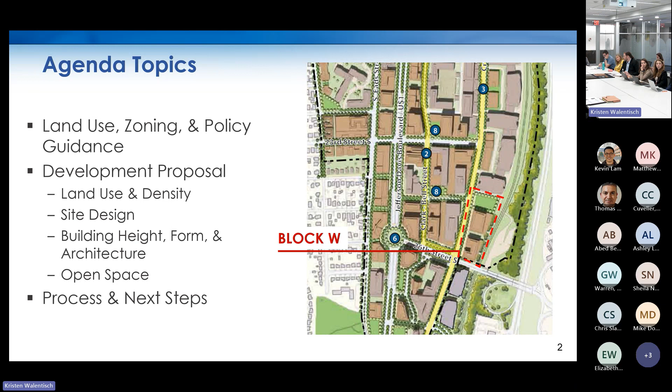So again, this is a refresher for those of you who've been along for the public review of this project. This is Block W. It's currently undeveloped and home to the sand volleyball courts in Crystal City, as well as a workout park, both of which are owned and maintained by JBG. There is also a playground and an outdoor seating area. There's a service road accessible from the 26th Street South and Crystal Drive intersection that runs north through the site, connecting to a gravel parking lot used for construction worker parking, and an underground tunnel that connects to a parcel east of the railroad tracks also used by JBG for construction worker parking. That service road also provides parking and loading access to several buildings north of Block W.

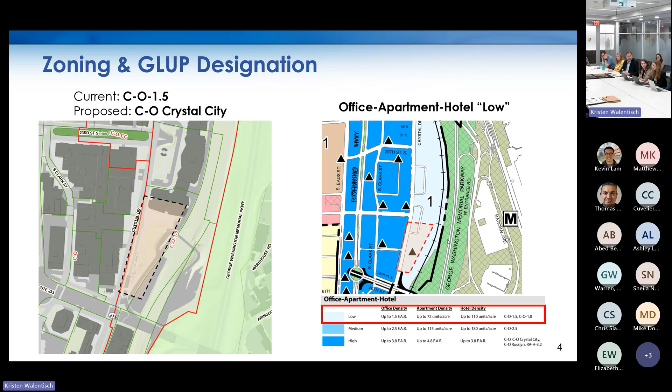Running parallel to Crystal Drive, there's also an exit ramp for the elevated airport access road, which provides connection to Crystal Drive from the airport. This exit ramp must be removed in order for the site to be developed as planned, and the removal of the exit ramp is also called for in the sector plan. The site is zoned C-O-1.5, and its designation on the county's general land use plan is office, apartment, hotel, low. Block W is also located within the boundaries of GLUP Note 1, which is the Crystal City Coordinated Redevelopment District, which permits heights and densities as called for in the Crystal City Sector Plan, where sector plan goals are being met. The applicant proposes a rezoning to CO Crystal City.

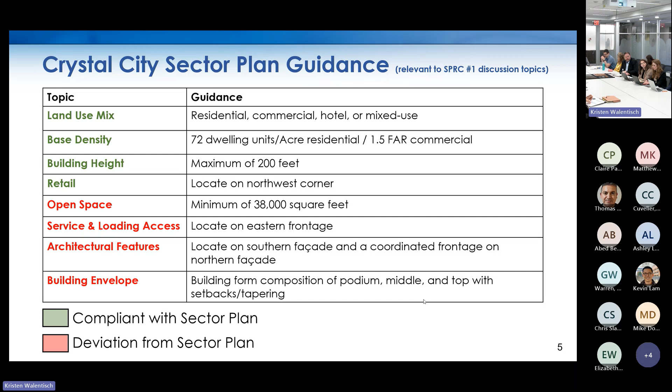Apologies. Staff has found the proposed development deviates from the sector plan in regard to size of provided open space, location of service and loading access, provision of certain architectural features, and guidance regarding the building envelope. We'll look at each of these in more detail in future slides.

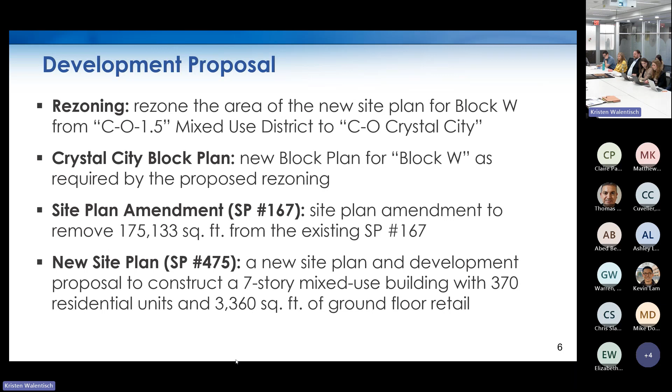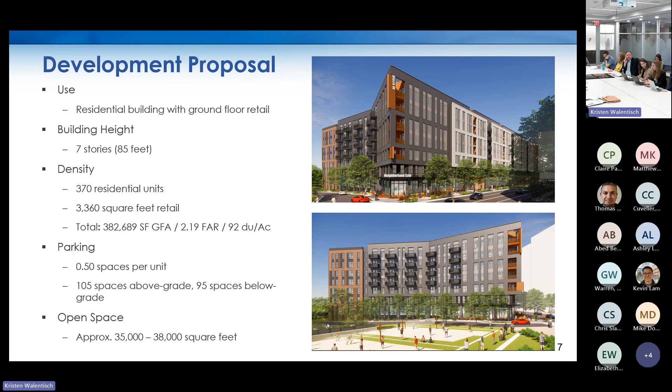Taking a closer look at the new site plan, the applicant proposes a mixed-use building approximately 85 feet in height, containing 370 residential units and about 3,360 square feet of ground floor retail. They also proposed a parking ratio of approximately 0.50 spaces per unit and open space in the size of 35,000 to 38,000 square feet. We'll look at that in more detail as well.

In an effort not to repeat what you've heard during online engagement, I've provided a quick assessment on the first discussion topic, land use and density. The proposed land use conforms with the sector plan's guidance for the site, and the rezoning is supported by the site's inclusion within the Crystal City Coordinated Redevelopment District. Regarding density, staff notes the base density is 72 units per acre, and the applicant proposes 92 units per acre. The density proposed above that base is supported by the site's inclusion within the Crystal City Coordinated Redevelopment District and shall be provided in exchange for community benefits.

The site design should be familiar to you by now. The site's been designed so the building is situated on the southern portion of the site and the open space is on the northern portion. The applicant has introduced a vehicular service road from Crystal Drive between the proposed building and the open space, intended to provide access to the underground tunnel and connection to properties to the north. Parking and loading is accessed from an additional service lane on the southern frontage of the site.

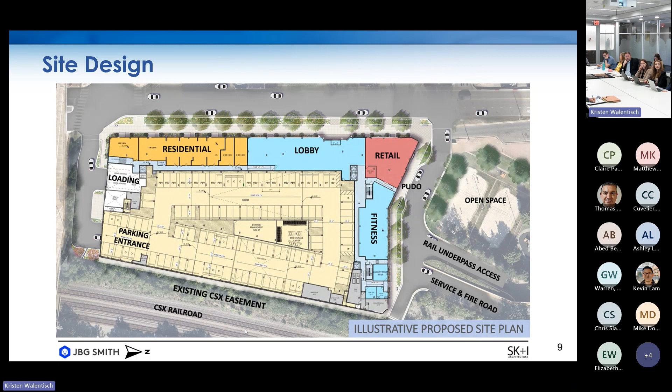We'll take a closer look at outstanding concerns on site design. First, staff is still reviewing the transportation-related impacts of the introduction of the service road mid-block. We'll plan to have updates for you at the second SPRC meeting. Secondly, as currently situated, the service road reduces the amount of open space that could be provided, which may affect whether the applicant can achieve the sector plan minimum required open space.

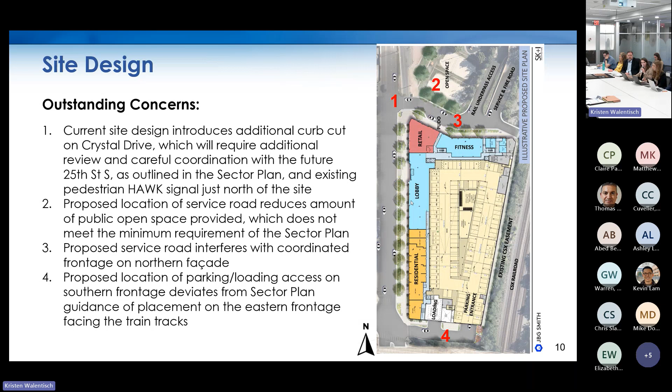Third, the service road interferes with the provision of a coordinated frontage fronting the open space on the northern facade of the building. Fourth, the location of the parking and loading access deviates from the sector plan's guidance that these elements be placed on the eastern frontage of the building adjacent to the railroad tracks. These are all elements proposed in the current site design that we'd like you to keep in mind for discussion this evening.

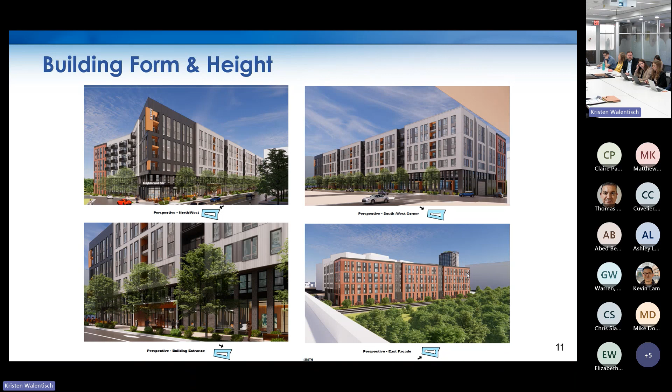Again, as a refresher on building form and height, the proposed building is 7 stories with a 2-story podium, and the upper 5 stories overhang that podium base. Renderings are on this slide.

Looking closer, because the building is much shorter than was envisioned for the site, the proposed building form is technically inconsistent with the sector plan's guidance on podium and tower composition. Additionally, staff has noted the proposed design lacks tower setbacks and also lacks a distinctive building top, both features called for in the sector plan as shown in the image on the left.

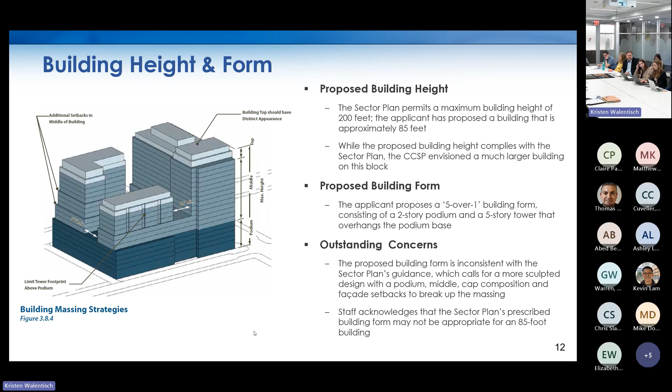Tonight, we'd like to hear from you as to whether that sector plan guidance is appropriate for a building of this size, among other aspects of that guidance.

With respect to architecture, the applicant has made some revisions to the southwest corner where an architectural feature is prescribed in the sector plan. The applicant will describe specific design changes in more detail in their presentation. We'd like your input as to whether the revised design achieves the intent of the sector plan's guidance for this frontage. You can see here the difference between the original architecture and the proposed. I'm sure the applicant will have the same side by side.

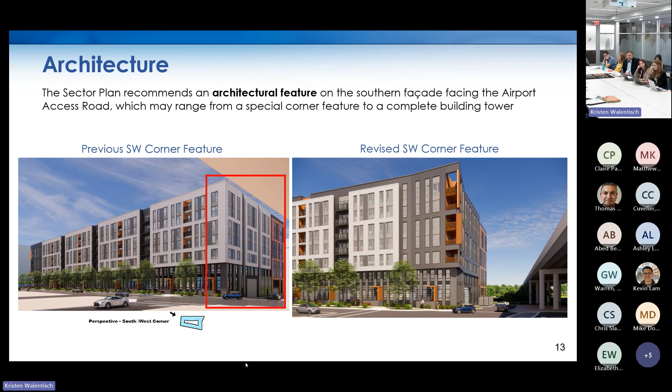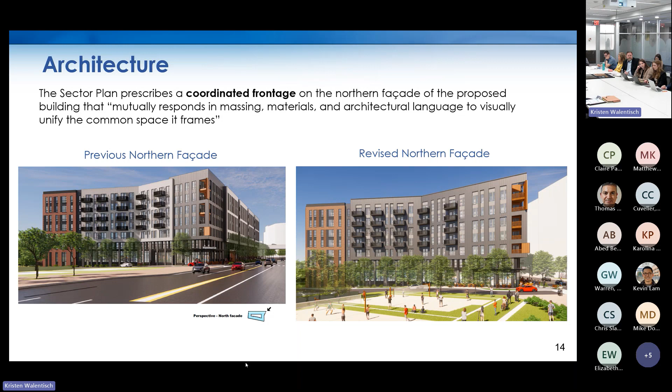The applicant's also made revisions to the northern facade where the sector plan calls for a coordinated frontage framing the park. Staff finds the revised design an improvement over the original design and would also encourage your thoughts on this detail as well.

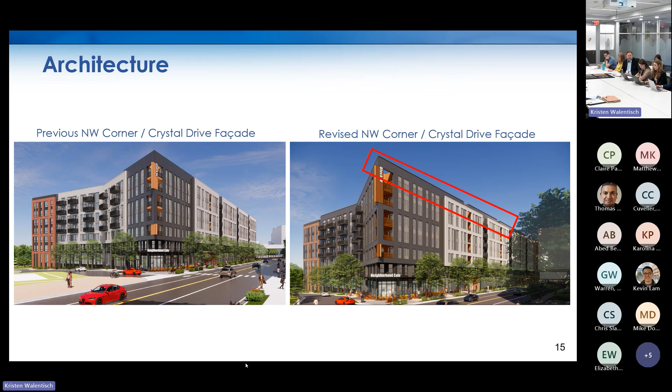Here also is a revised design for the northwest building corner, which the applicant will describe in more detail. Do keep in mind that there is architectural guidance in the sector plan, but there's not architectural guidance in the sector plan for either this corner or the Crystal Drive frontage. It's on the upper stories of the building.

And then we are going to leave the open space discussion there for now and discuss landscape and streetscape features at the next meeting.

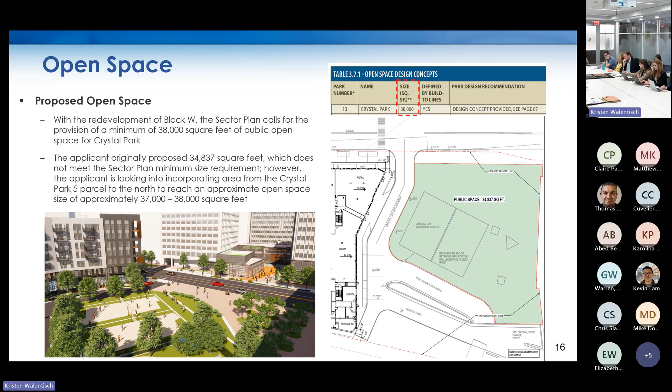Looking at the public review process, we're now at SPRC meeting number 1. Again, as previously stated, we had the LRPC meeting in December and SPRC online engagement in February. We're here talking the first half of the SPRC topics tonight, and then likely next month we'll have the second of two and the final SPRC meeting on open space part 2, landscaping, transportation, sustainability, community benefits, any other topics that may arise or as a follow-up to this meeting. After that, we will be looking for the project to advance to advisory groups and commission meetings and then on to the county board.

Just to quickly summarize the online engagement opportunity that was held last month, we did receive a lot of comments, so thanks for everyone who participated. A lot of comments are split in regard to their thoughts on the project, but most of the comments received were in line with the agenda topics we outlined in the presentation, which were in regard to building height and density, site design, and specifically the service road and the airport access ramp, the size of the public open space, comments on building form and architecture, and then also transportation in regard especially to those bike lanes, pickup and drop off locations, and parking and loading access.

A summary of the common topics is posted on the project's webpage, as well as a link to a comprehensive list of all the comments received. On the project webpage, you can access all 308 comments within a form, as well as a summary of common topics that were picked up by staff. The applicant and staff have responded to those common topics. And that concludes staff presentation.

Okay, well, thanks everyone for having us. As I mentioned, my name is Dolores. I'm the vice president within the JBG development group who's leading this project. I'm here with several of my colleagues, and both myself and Andy will do part of the presentation for today. But before we jump into the specifics, I wanted to lay the groundwork for what we're going to be discussing, as Kristen mentioned, the site context. So bear with me, it's a lot of the same information that we talked about in LRPC. We'll go quickly through this: land use and density, then the existing site constraints, the site design, and then I'll hand it over to Andy, who's going to be talking about the building form, the architecture, and the building height.

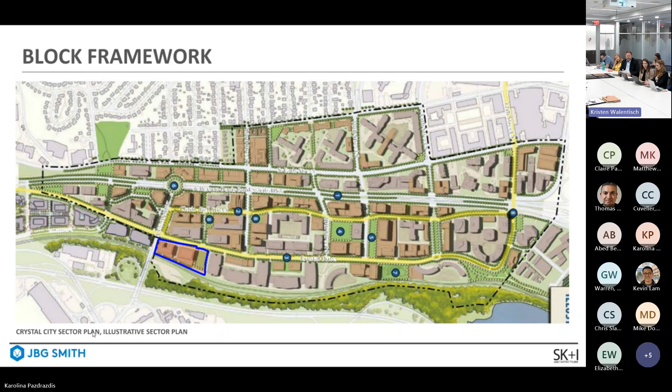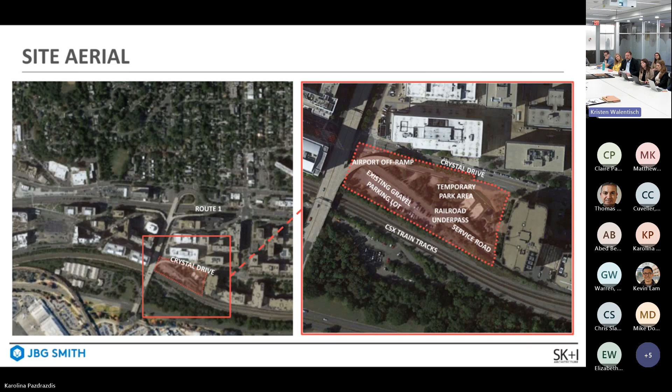We have some site context here. The top two images are from the ramp, indicating the current architecture there, and the bottom images show the temporary park on the left-hand side and the service road condition on the right-hand side.

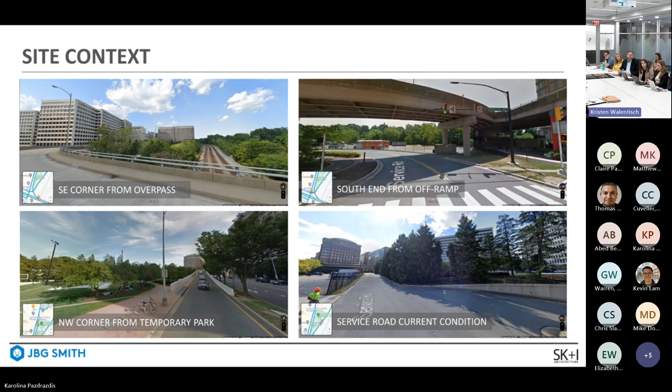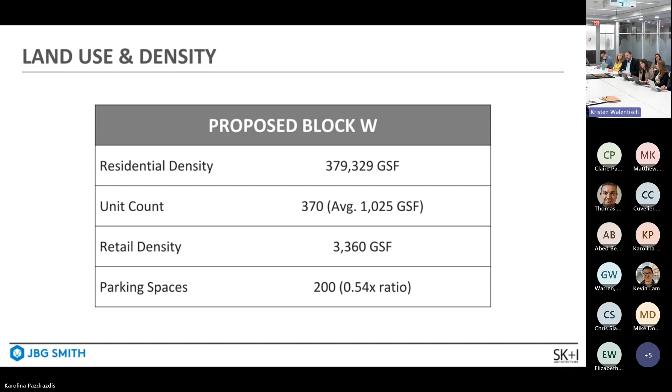From a land use and density perspective, our proposed plan is a five-over-two residential building, just shy of 400,000 square feet, 370 units, and a little bit less than 4,000 square feet gross on the retail density, and then 200 spots within the structure at a 0.5 ratio.

Here, what we wanted to talk about is our proposed plan in the context of our JBG portfolio. It's important to provide visibility to what we've been doing for the past several years. The last four entitlements that the firm has gone through, all within Crystal City, as many of you have participated in, have been high-rise buildings.

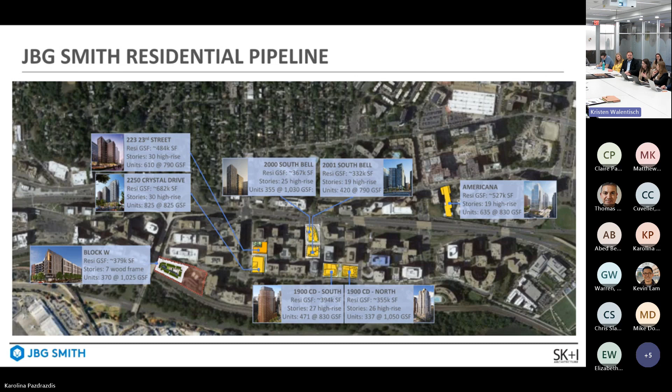We are going to be delivering, or will be in the process of delivering shortly, the two residential buildings for 1900, seven new high-rise buildings for the neighborhood. So when we look at the opportunities for housing across Crystal City, we're excited to be providing a different typology here — one that, if you look at the portfolio as a whole, has larger units and is catered towards two and three bedrooms, accommodating cheaper rents and larger units for families. That's the goal here.

From the existing constraints, before we jump into the specific site, one thing we wanted to provide highlights and an update on was the ramp. While, as Christy mentioned, this is not something that will be determined through the 4.1 process, we did want to make sure we were talking about this, because we do have to bring the ramp down in order to build the new building.

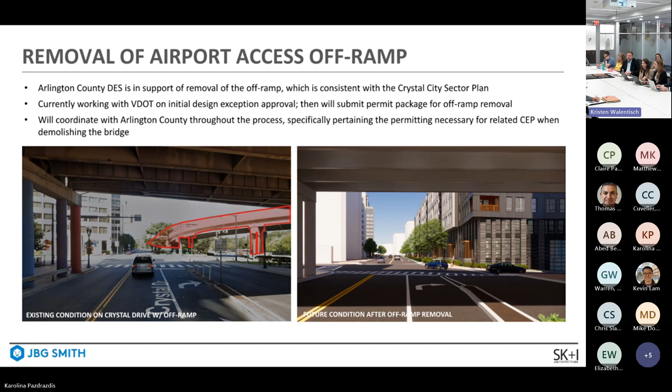From a removal perspective, the sector plan does support the removal of this. We've been working with Sergio and VDOT on the particular process, which will determine the different adjustments we'll be making to the sidewalk to ensure we still have a pedestrian path. One of the things we're doing is actually narrowing the lanes.

You can see here the whole area in blue is the area we will be providing improvements to. The ramp on the right-hand side is what will be coming down, but we will be making improvements all the way to Pier 12 to give you some of that transparency. One of the things we're going to be doing is expanding the sidewalk, making it ADA accessible by reducing the lanes within the ramp, or the overpass there.

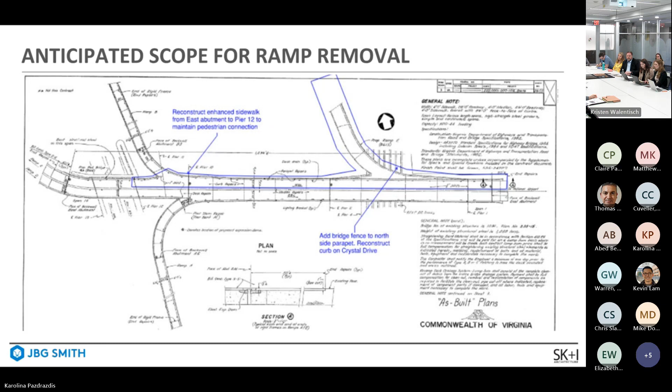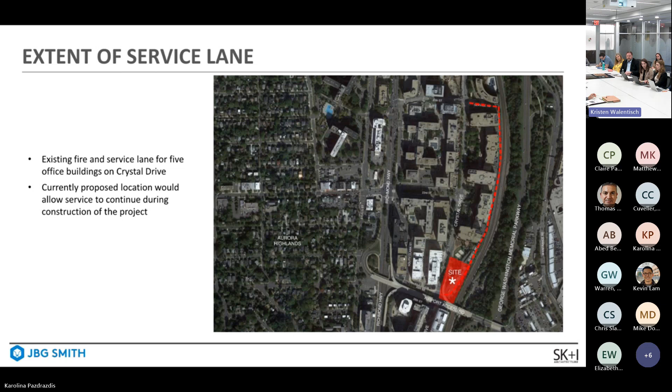One of the constraints we have here is the service lane. We have five buildings to the north of our site that have to be served by the fire and service lane that enters into our site. So we've designed a proposed plan that actually allows for that lane to stay open so that the fire marshal can go and service those buildings to the north of us. Next slide.

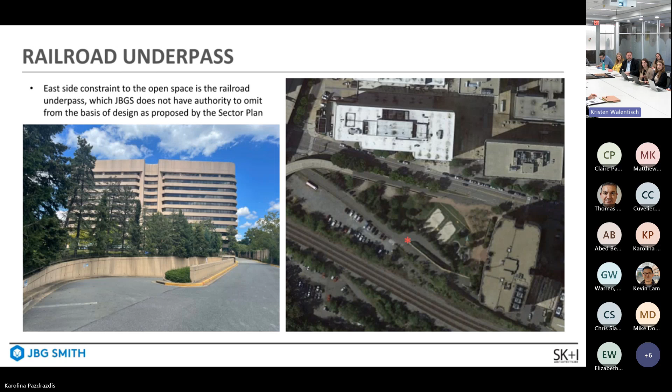Another constraint that shaped the way we were thinking about our design is the railroad underpass. On the east side, this constraint is unique in that it's not mentioned in the sector plan, but it's something we can't avoid, particularly because there are multiple parties responsible and have rights protected for access in and out of that tunnel. That's not something JBG can just have go away, so we have to work within those constraints.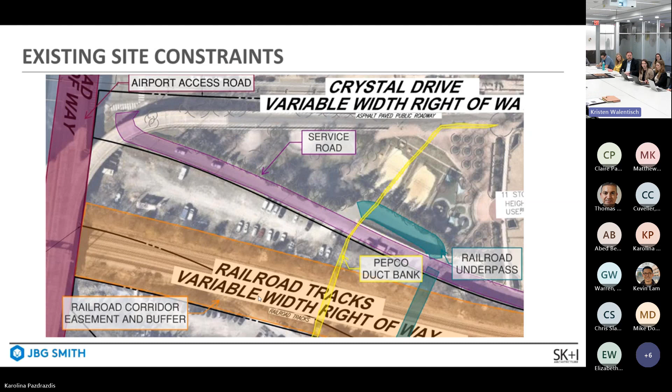From a site design perspective, we've studied a lot of different components and layouts of the site, and we're excited to be proposing this. What you see here is essentially all of our constraints within the site, but also with the ability to prioritize the open space on the right-hand side and really ensure we're meeting that 38,000 square feet we talked about. The 4.1 didn't necessarily hit it, but we've worked with staff to get closer to that number. As we heard in LRPC, this was a big one to make sure we were meeting.

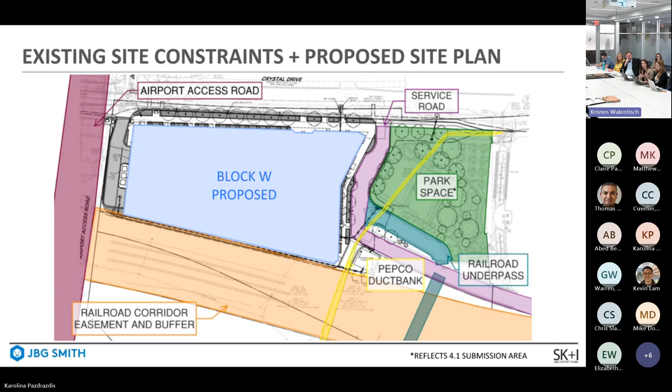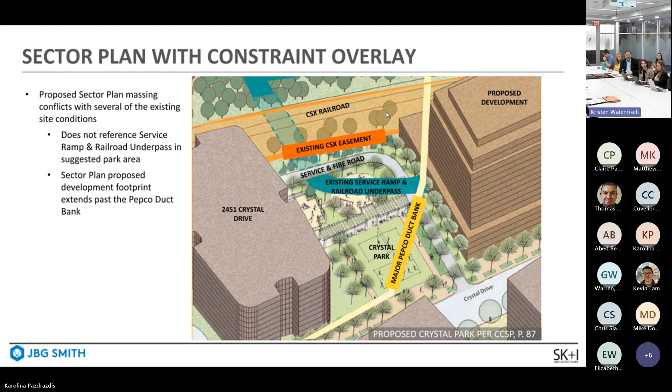Here we have the sector plan with the constraint overlay. One thing we wanted to point out is the illustrative nature of the sector plan and how it pairs with the existing conditions of the site. As mentioned, there's no reference to the underpass and the railroad pass through the middle of the site, so that's something we have to call out. We also don't have a major duct bank called out in the sector plan that goes straight into the proposed development site, as well as the existing easement buffer that also eats into the development site.

So what we've done, with Andy's team and Sheila's team, Bowler, is really work through what the sector plan suggests and where it actually places the service road. You can see it highlighted there, on Crystal Drive - that's what's recommended based on the illustration. In order to ensure we're pulling back and not hitting those constraints, we're reducing the site we're developing on to allow for the service road to stay in that location.

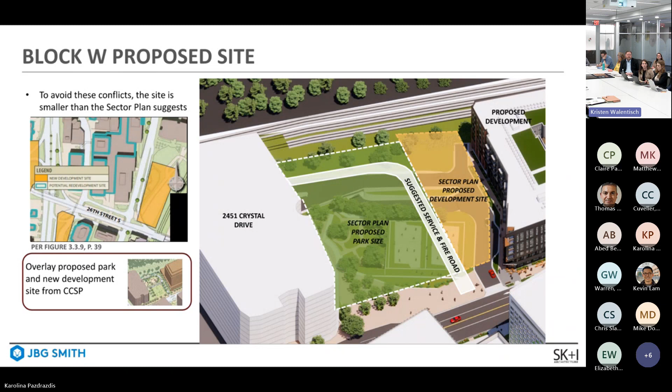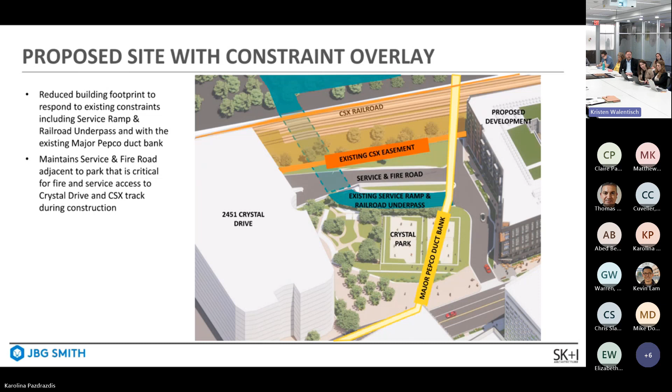Here you see our proposed plan with the constraints overlaid together and how it all works, allowing us to respect the constraints while still optimizing the design of the building and the open space.

To walk you around the building - we'll go into specifics, but just laying the groundwork on the illustrative proposed site plan - we've got residential and the lobby facing Crystal Drive, anchored by retail on the northwest corner. We also have fitness wrapped around the park, that's the most active use. We have a bike entrance to the south of that, as well as a pet spa, and then parking entrance and loading to the south. We wanted to ensure our more active uses were facing the park, bringing that activity, and Andy will talk about some of the ways we're doing that with the facade as well.

We'll also call out that we have the PUDO wrapped around next to the park. We think the park is going to be a pretty active use, so we want to ensure this is a location that can be geofenced, avoiding some of the conflicts that would otherwise happen on Crystal Drive. To ensure folks are guided to that area, we have a secondary lobby entrance that allows residents to exit onto where the PUDO is located.

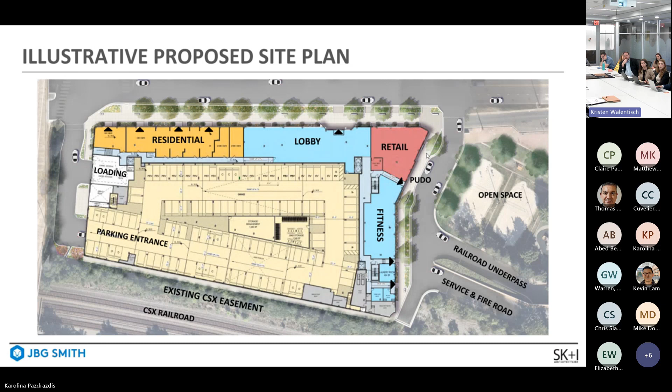From an open space perspective, we talked about this - it's a little hard to see, but the hash in hot pink is the extra area space we're talking about adding to the easement to make sure we can hit that 38,000 square feet.

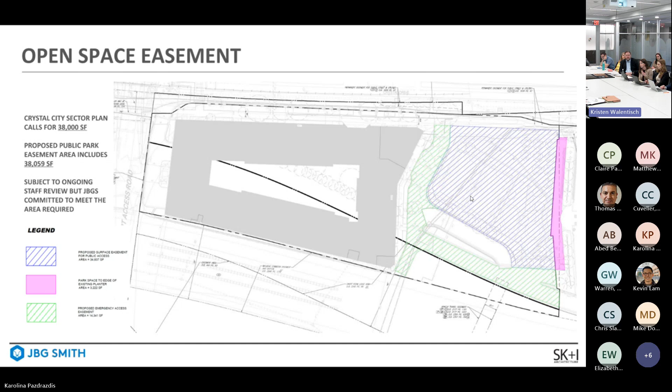So we're thrilled to finally be here. I feel like we've been working on this for quite a while, but it's really great to finally come here and present it to you.

So I'll start with the CSX railroad. This building abuts the railroad, and we knew this would influence the design of the block, both from a sound and noise perspective, but also from an aesthetic perspective. So we started looking at classic industrial precedents and reflecting upon their scale, color, texture, and material palette. Then we thought about designing a modern interpretation with emphasis on metal panel additions that would complement historic structures, while introducing contemporary brick detailing that would add texture, depth, and shadow to the building.

While researching the history of Crystal City, we discovered there was a former brick kiln nearby, and collectively the team thought it would be fantastic to reintroduce the spirit of that building into Crystal City on this site.

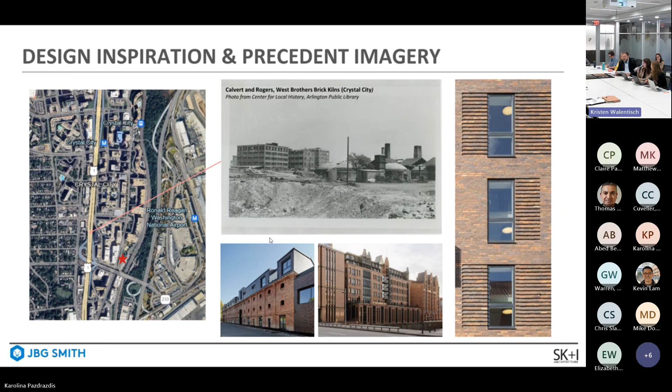So let's go to the next slide, material samples. This sort of inspired the palette. We have the samples here on the table as well.

We've been thinking about the warm, rich, familiar Mid-Atlantic red brick, along with sleek, modern black brick accents, both for the base of the building and then panels within the red. We'll talk about that. The masonry is paired with warm and rich metal panel - dark bronze for the body of the building, warm grays for the bays, and then a copper penny accent color to really highlight architectural features on the building.

Feel free to touch it, you can pass it around if you want to.

So this is the massing diagrams and articulation of the building. Speaking of this copper penny idea, we conceived this building's massing as two sides of a coin due to the distinct two frontages of the project. The head side is the Crystal Drive frontage, with the primary feature being the 5-story dark bronze canvas on the top layer of the diagram.

That yellow streak is a 5-story dark bronze canvas that sits upon a 2-story dark brick base. In the secondary, third slide, we have these series of warm bay projections that run along Crystal Drive, acting like a series of train cars, inspired by the train tracks running down the track.

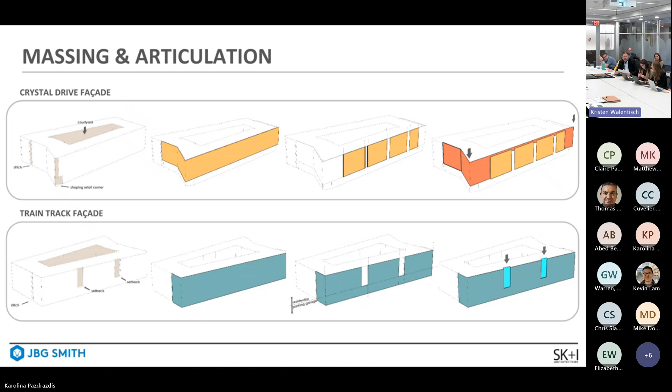Next slide, the Crystal Drive facade. This west facade is set by the 5-story dark bronze metal panel canvas over a clear and distinct 2-story dark masonry base with rich, modern iron spot bricks that are here on the table.

Off of this dark bronze canvas, we project these warm gray metal panel bays that run north-south like train cars, each separated by clear hyphens accentuated by hanging balconies. The walls of the bay are visually syncopated with varying window arrangements and accented darker panels to create variety on the larger bays.

The base running along Crystal Drive is activated north to south. We have retail at the northwest corner, called for in the Crystal City Sector Plan. Adjacent to that is the building lobby, lounge, and leasing center in the middle of the building. As you go south, we introduce residential stoops to the ground floor units. This dynamic northwest corner with the copper penny accent panels and frame balcony assembly creates a visual cue.

This is part of the reason why it's inflected, so that we create this iconic moment at that corner that draws people down to the park, to the retail, and to the building.

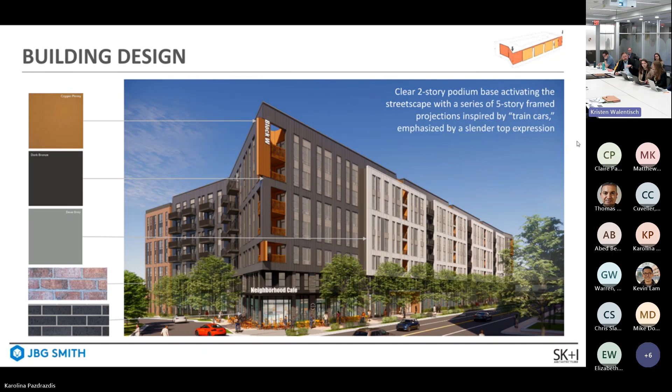So this is the CSX frontage, turning to this east facade facing the train tracks. We introduced again the warm, rich Mid-Atlantic red brick.

This long facade is separated by a pair of recessed bays, vertical hyphens that create three distinct, equally arranged, proportional building segments, recalling the more historic precedents we mentioned earlier. It's a more manageable set of facade pieces that march along the train tracks.

The masonry facade mitigates the noise for the units, so it's really important for us to have the masonry back here. You can also tell the windows—we've used a lot of single and double windows, and we've worked with the noise consultant. We don't want to go much bigger because larger windows can let in a lot more noise.

But this facade actually has a lot of layered detail. We layer ribbed masonry detailing in various locations along the wall, as well as dark brick accents placed within to create changes in color and texture. Combined with the window fenestration, this creates a syncopated and visually interesting mosaic along the train tracks, out of very pedestrian but friendly materials that we're all familiar with.

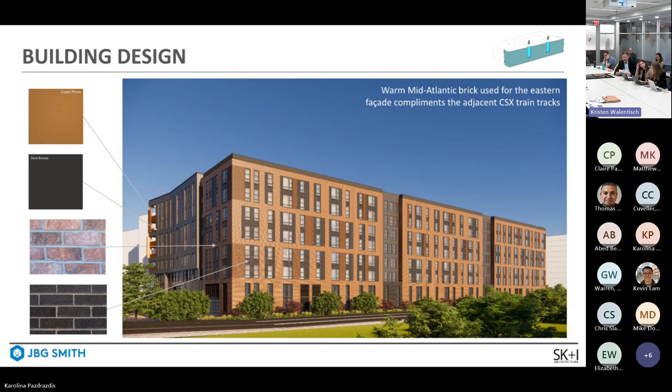So this is the before and after—the initial 4.1 on the left, and the current design on the right. We've been working with staff and responding to their comments. The big comment specifically was that the building lacked a top, and we understood the rationale behind that.

So what we did is we ended up extending the parapet of the dark bronze up, and we lowered the roof of the bays down so that the dark bronze now runs continuous from the north end to the south end and visually connects the entire building. It's above the train cars, so it really visually connects the entire building and helps the reading.

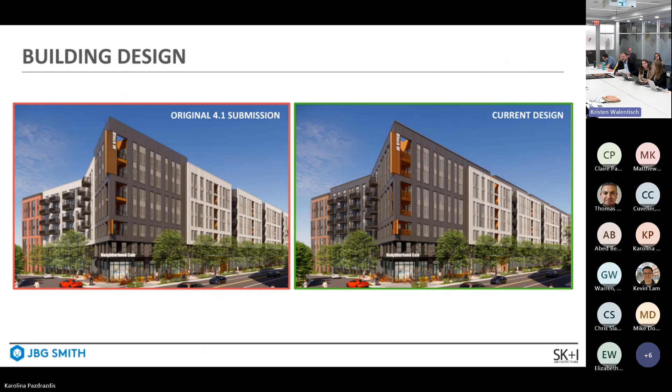Now we'll talk about the coordinated frontage—this is the part of the building, the north facade facing the park.

We really think that this facade responds to the shape and scale of Crystal Park. The geometry inflection of the plan is formed by the angle of the park, the service road, and the new streetscape against the building with sidewalks and street trees, etc. So we feel that this shape really responds well to the shape and nature of the park.

This form—we've allowed the warm brick facade to return all the way to the east and connect with the railroad facade, the CSX frontage to the east.

We think the ground floor is activated. We have the retail at the corner, we have the pickup and drop-off right there, so there'll be pedestrians coming and going. We have the residential amenities on the entire ground floor, and the fitness center is located there, so we'll have activation and eyes on the park at that location as well.

On the left side of the screen, underneath the brick masonry, that'll essentially be the back door of the building—we'll have bike access and pet access through there. So that'll be a regularly used entry for the building as well.

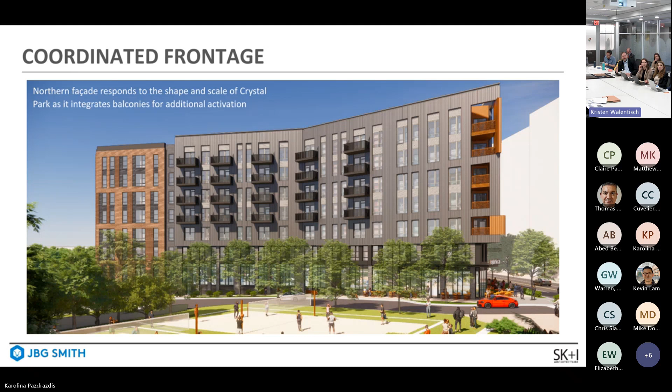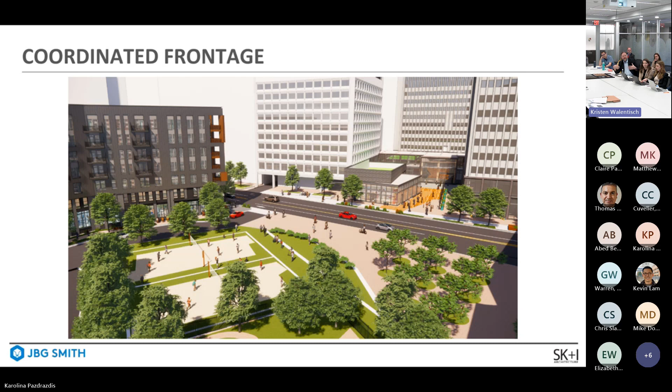Another thing we really wanted to introduce is the relationship of this new retail in this corner to what's happening across the street. We know the Trader Joe's is going in, there's new retail, so this new road and the park and the angle all respond and address the park and then point back to the new retail across the street.

Just listening to staff's remarks, you can see the progress from the initial design to the current. Initially, we wanted to reintroduce the Crystal Drive bays on the north side of the park, but the additional layering seemed staggered and unnecessary. So we simplified the facade, which now extends the northwest corner and frames the park back to the masonry facade on the CSX side.

These enhancements really unify the facade now. It creates a stronger top because the parapet is a little higher. We're providing a detail at the top, like a shadow line at the cornice, to help reinforce that—more of a modern, slick detail. I think those are the improvements, but we've also maintained the balconies, because we want the activation of those residential units looking at the park, having eyes on the park, to create the safety everybody wants.

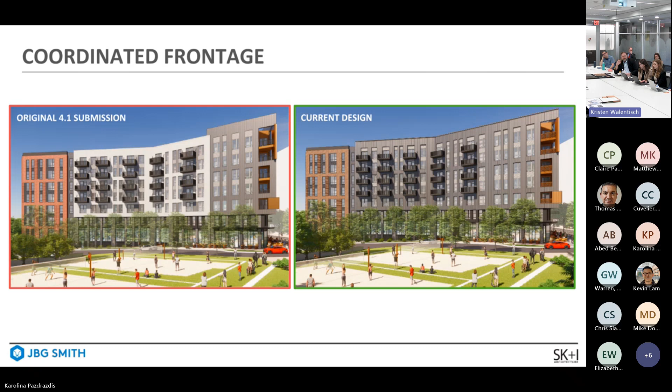So quickly, I'll talk about the south end—this is the service and loading area. This is pretty simple: this is the south end of the building. We've reused the existing curb cut that's currently there, and extended this service lane towards the CSX tracks, essentially creating an alley adjacent to the underside of the existing airport access road.

As stated in the Crystal City Sector Plan, loading, service, and garage access should be located on side service lanes and alleys. So this is exactly the condition you see here. We've set that up.

Access is visually minimized from Crystal Drive due to the relative width between the building and the airport access road. We thought about this width a lot—it's adequate to provide vehicle movement and turning radiuses, and it also allows adequate distance for the residential units above to have visual clearance from the airport access road. And we've been able to keep Crystal Drive activated the entire time.

So we have all these ground floor units marching around, and that corner unit actually turns and returns. There's a slight inflection in the plan, but it helps block and conceal the service areas beyond.

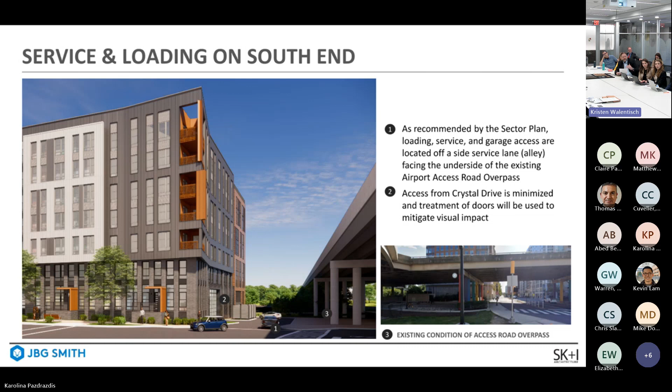And this is the last bit, the southwest—this is the southwest corner.

Okay, great—well, this is a key one, this was a hot topic. This is the architectural feature at the southwest corner. Originally we thought we'd simply return the train car, as in the first slide, providing a straightforward solution, but staff didn't think that was adequate. So we echoed the northern corner and brought the copper accent down, as in the middle slide—and again, that was not sufficient.

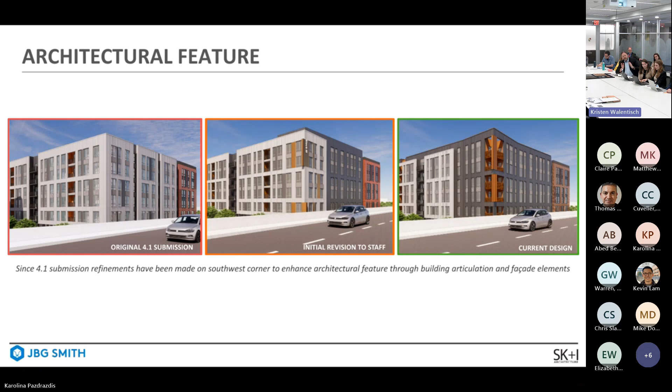So on the third slide, part and parcel with adding to the top of the building, we let the top run down, then shorten the last bay, and reintroduce the bronze feature, unifying the north and south corners. We've extended the bronze canvas, and inflected the corner bay out as well, so you catch glimpses of it as you're coming from the airport, from the west, and from the south.

We've really recreated this corner balcony assembly—there's actually light coming through the top that glistens through. Now we're adding a distinct, bold geometric pattern to the balconies, both at the north and south corners, hoping to find a geometric pattern that complements the railway theme with strong linear lines. And then, obviously, cladding in the distinct copper penny unifies the building's architectural features.

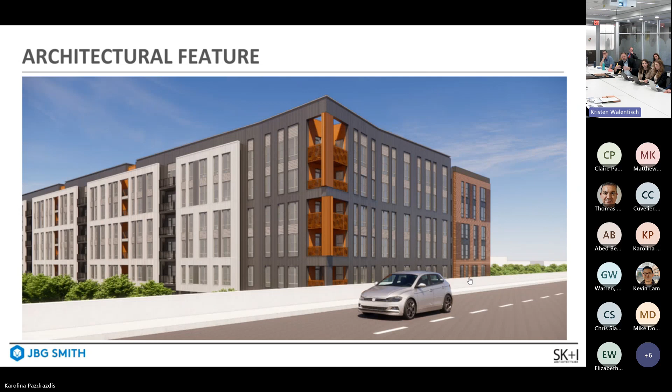So that's the end of the architectural piece—thank you for your patience. Okay, let's move on to our agenda then. Why don't we start with site design? Do we have any clarifying questions around the table that anybody wants to raise on that topic?

Can I ask, did I hear you say this would be less expensive rent? So will it be below market rate, or market rate? Because market rate around here is usually expensive. The intent is for it to be less than some of our other buildings we're developing, so relative to market, it would be a little less. And it's per square foot, so it depends on the unit size.

And what is the mix of 2 and 3 bedroom units? Roughly a third of them are the larger units, and that will continue to change as we refine the building.

I know this would be discussed more in community benefits, but normally it's in these slides - any contributions to affordable housing? We're still working through that, we have to work with staff. It's premature for that right now.

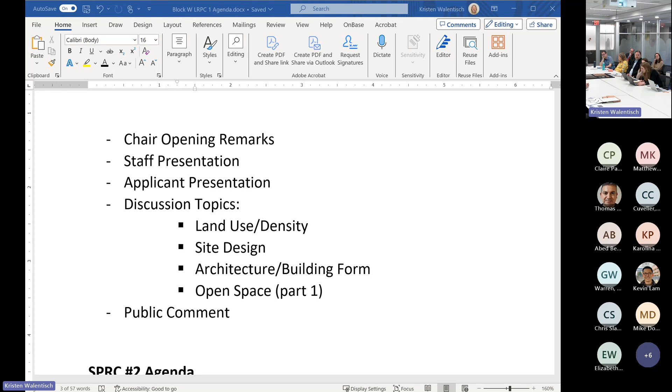Let's pull up a map so we know exactly what we're talking about. We'll project it so everyone can see. About that area right there? Yes, that area - where is this, which one? The Service Road and Fire Road. So south of that? Yes.

Right now it's just planted trees, so really nothing going on there. We'd be happy to put that toward the open space easement. It'd be nice to be able to walk through.

So there's no - what's the word I want - there's no place that can go, right? Because the service road takes up all the space to the north. Correct, it would just be kind of that triangle zone.

Okay, so that's a good point - that's leftover space we could talk about when it gets to landscaping and park use. Hold that thought and raise it then, so that will be part of that discussion. Thank you, other clarifying questions?

Ann, I have a bunch of questions about this slide - can I raise them? Sure. Very sorry, my apologies. But is the slide coming for you? Where's the slide?

My first question is, have you thought about switching the fitness area and the lobby? We really need bike lanes on Crystal Drive, and because the lobby's there, people are going to stop there and that's going to be a terrible traffic mess. What is your thinking in having the fitness over there and the lobby on Crystal Drive? I think visually, people are going to be seeing the building from the park side - you're going to be so close to the street and the buildings across the street, I don't think you're going to really appreciate the lobby if it's on Crystal Drive. So that's my first thought, I don't know if you can do that.

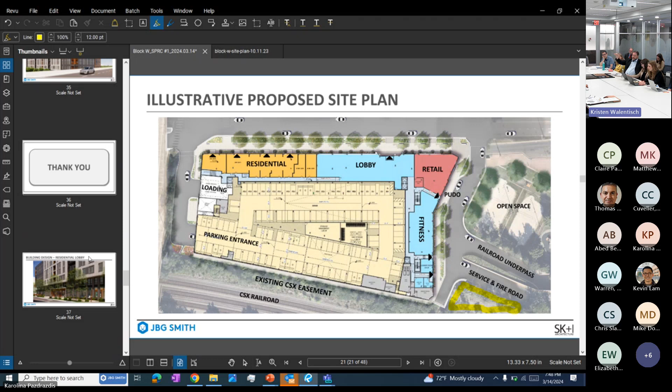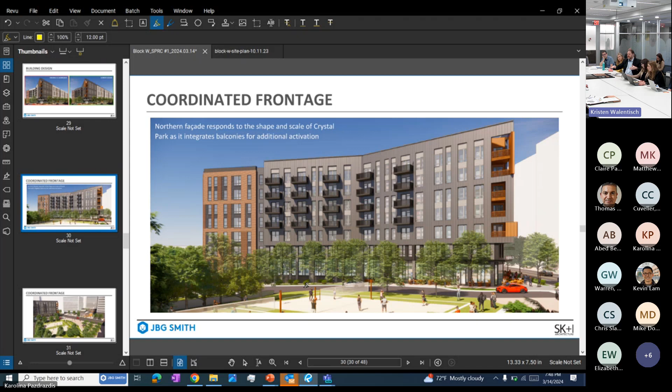I forgot what it was, but I can answer about the lobby. I think distinctly JBG would want a Crystal Drive address for the building, so the lobby would want to be there - the fire truck wouldn't go there from a safety standpoint. Also there's actual topography in the park that drops - Crystal Drive is high and the tracks are low, dropping several feet. So the fitness center actually works well there because it sits several feet above the sidewalk as the sidewalk goes down. We have staircases in the back by the dog and bike area that get people up. I think you're really going to need to figure out who's on Crystal Drive because they're going to be...

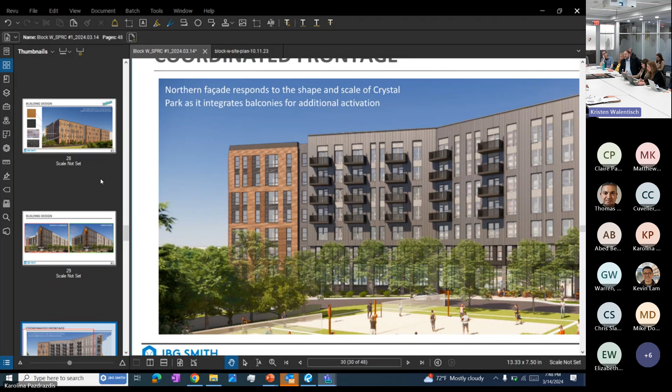My final question was already asked by Eric, and that is what was going on in back on the east side. Thank you. Okay, we have a couple of virtual commenters.

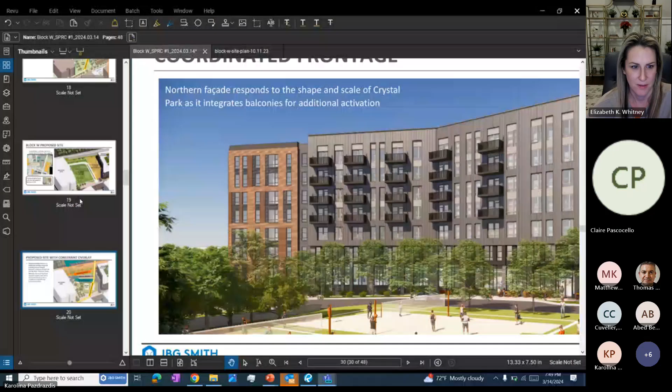Thank you. Did I understand correctly? There was a proposal to relocate that access road across the park. There was a slide that visually made it look like it was going to cut into that open space there. I think it was slide 20 or thereabouts. So we have the slide, the illustration of the sector plan. Is that what you're referring to? It must be 19.

Yep, so what you could see cutting over there, that's what the sector plan calls for in terms of the location of the service lane. Sorry, just to jump in and clarify, the sector plan does not specify that the service road be located there. There is one image in the public open space section of the sector plan that shows it there, but it is merely an illustrative image. So the sector plan doesn't clarify where to put the service road, just want to point that out. But it does show it there in one specific section, but in no other instance in the sector plan.

But does it recommend that that's where the service road should be routed? I would call that just elucidating the ingredients that need to happen on this site more than actually determining the design. So it's the illustrative image pointed to in the sector plan that shows us this. Okay, so there's no proposal to bisect the existing open space or the open space in the plan. Okay, thank you.

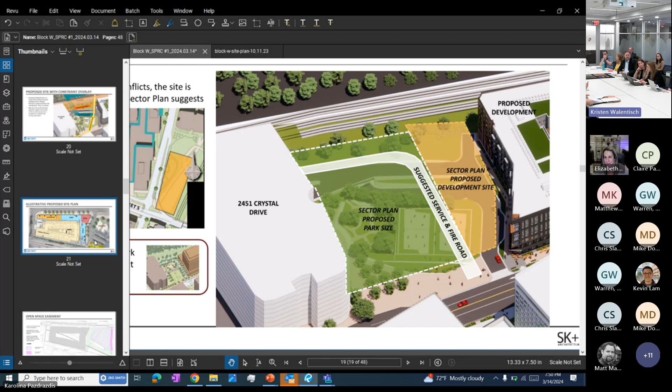Actually, you just addressed my question, so I'm good. Thank you. Okay, thanks, Mike.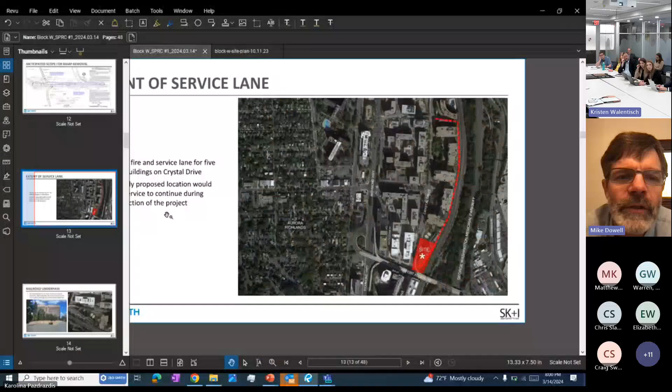So actually, you could circulate all the way up to the top. There's an exit at the north of those 5 buildings, you can see there. So cars, practically speaking, going to be trying to pull U-turns in the middle of that? Yeah, we're also working with staff in terms of the turning radius and right-in, right-out and things like that. Working with DES in particular on that.

Yeah, Mike, I took it in my car. It actually, you can exit on Crystal Drive in the north there. Yeah, it's sort of weird, but it goes through. Yeah, I remember doing the Crystal City 5K, we used to do that.

Yeah, it does seem like something to pick up. It just seems kind of awkward, but maybe we'll pick that up in the transportation section. Right. All right, thank you.

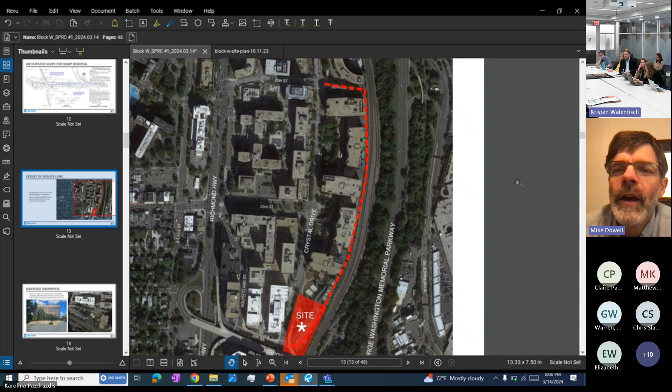Go ahead, forgive me, I don't know if this is a site design question or open space question, because they seem to kind of overlap to me. So if I'm too soon, just let me know, bring it up later. Forestry Commission, trees are the big deal. Open space is the biggest deal. I'm not really, your designs look beautiful. I'm not going to comment on the brick, they look great.

When we met last time, we talked about the possibility of having a slightly taller building to reduce the footprint, to give you more flexibility to do things. And it seems to me that if you were to have a slightly higher building, you can meet all the residential and retail needs, and also run your service road right along the east entrance all the way from where your parking entrance is, not even cross the open space, as it does with the other buildings along that route. And then it would give you more flexibility to have more open space. You could still have the entrance to the underground underpass, but it would just give you more flexibility. So help me understand why you're not digging into that, because it would seem to solve a lot of your problems that we're talking about here.

From a height perspective, you mean? First, I'll tackle that one. I think there's balance between being able to underwrite the deal and making sure that we can move forward with construction and providing the additional housing. And the building typology of a 5/2, we just cannot go higher than that. So then you're looking into a high-rise building, which is what we've been building in Crystal City, and that caters towards smaller units, higher rents, and then we're back at square one in terms of all the items that we had talked about. So it's a balance between being able to provide this additional housing product and the typology that we're working with. So that's to answer your question.

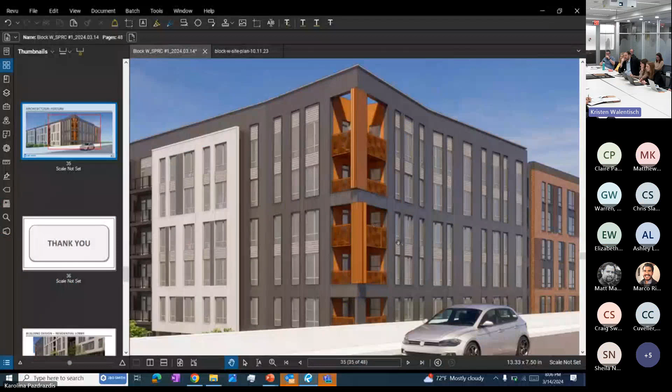Yeah, corners - one of my questions, I love the new balconies, I think they're great. And are they accessible by whom? Just the people who have that unit? Well, that's a private unit, yeah. Okay, private unit. And for the top one, is it open above it? Yeah, we can design them so that they're open above.

I think it's nice when we standardize the dimensions of our balconies too, we think about what can fit there - so if you wanted to have some sort of little patio umbrella, it'll fit, in comparison to those tiny balconies where you can barely fit a bistro table. Yeah, or a Juliet balcony where you just put a bicycle there and that's it.

Yeah, that's what I was trying to get at, how big they are, because it's hard to see on a graph what size you're talking about. I think comfortably a table and 2 chairs easily can fit there for a conversation. And they're for a single unit, not accessed from both sides, right? Yeah, those are single.

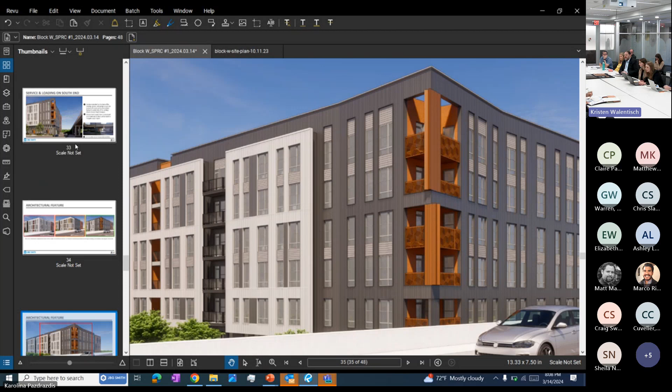And the regular balconies on the north side, they're basically rectangular. How do the sizes compare to the corners? The balconies on the north side are generally 10 feet wide and about 5 feet deep, so you can get 2 small chairs and a small table up there.

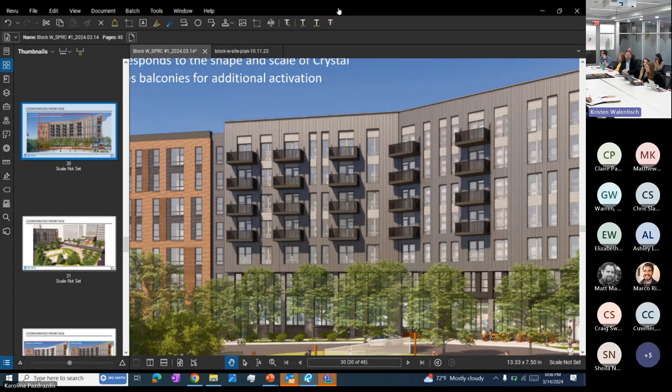All right, I have a few comments, not in any particular order. First, thank you to staff and to the applicant. I believe the improvements are great, particularly the north facade. It starts to talk about a tripartite composition without overdoing it with the material switch. That inflection point creates a more nuanced approach with continuity of material, so that's a particularly successful improvement in the facade.

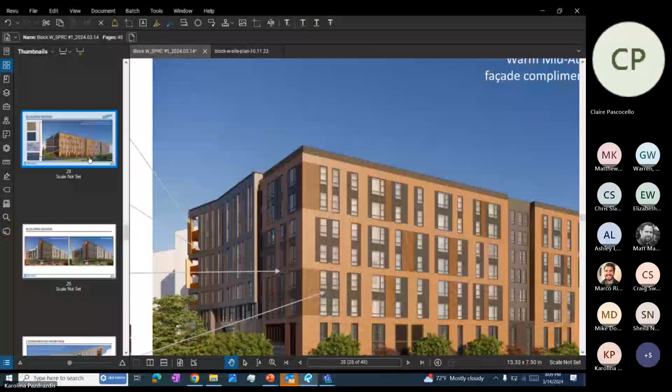On the track side facade—if you can go to slide 28 of 48—I would urge the base to also be continuous. I think you're 99% there; it would just need to not switch the color, per the diagram on the previous slide, or on the little corner. I think that diagram is very successful. That hyphen at the bottom, if continuous, goes back to the train track analogy where that would be the track, creating this platform. I think it also relates to the sector plan with the base being articulated. So that's a minor change that would just create continuity in color and texture.

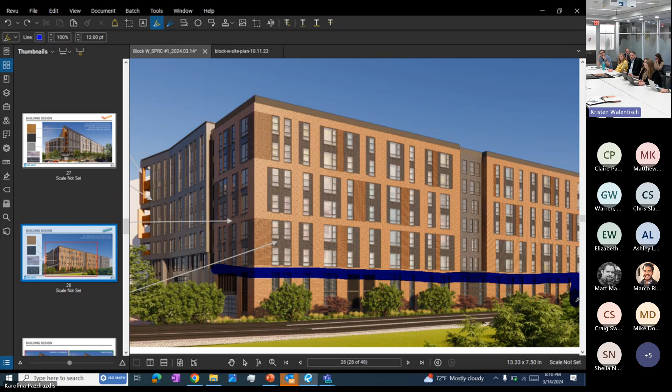You're suggesting a dark base, possibly? That's up to you—I think the color right now is very successful, and that goes back to the warehouse precedents you were looking at. The whole construction of precedents on warehouses is that they tend to be very simple with a single-minded palette. In the example you had, you create this framework of a single material, and then you have the insertions, additions, or renovations that create that patina. One example showed a warehouse with an addition that had a completely different brick. That's sort of what would make sense here, instead of breaking what would be the historic base—I think it's best to stick with that narrative.

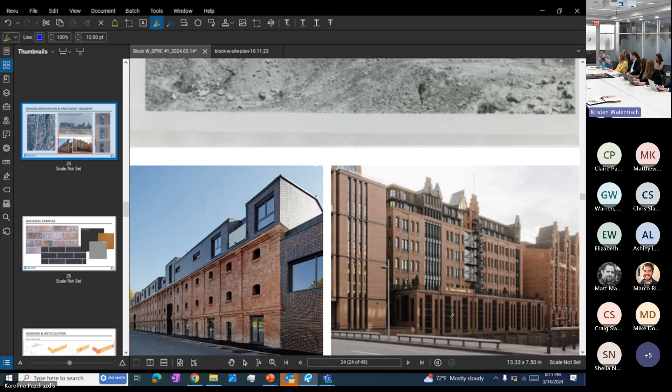I continue to have difficulties with the location of the loading, and now more so, it's right below the architectural feature corner. If you Google Earth it, you can see that loading dock is going to be visible from a very long distance. So again, the paradigm on the park side—I understand the gym and all that—but the truth is the park is at an angle if you look at the plan, and even in the illustration, it's really planted beyond seeing that corner. I think you referred to it as a back door, but I think the loading dock would be much more successful there and create an opportunity for an urban gesture. From an urban perspective, on the street, you want activity, not a loading dock.

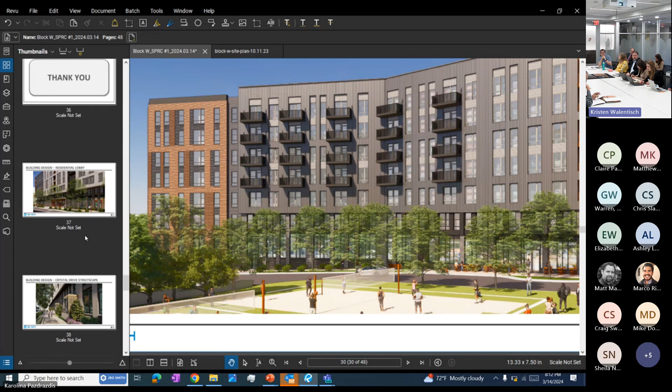I think that corner, the southwest corner, is quite prominent per the architectural feature, right? And the fact that it's under a bridge shouldn't be misleading, because I think that's actually a park under there too. So we're going to have activity there—we're going to want eyes on the street there also, if not more than on this side. So again, the loading dock on the access road, which has a little dead end, is almost perfect for it—it's almost designed, you just have to put it there. It wouldn't interfere with traffic, and it would interfere less with the garage entrance. I think it also goes a little to the sector plan, which wanted everything on the east—did I say that right? But since we don't have an east facade, I feel like we should at least favor the east as much as we can on these uses.

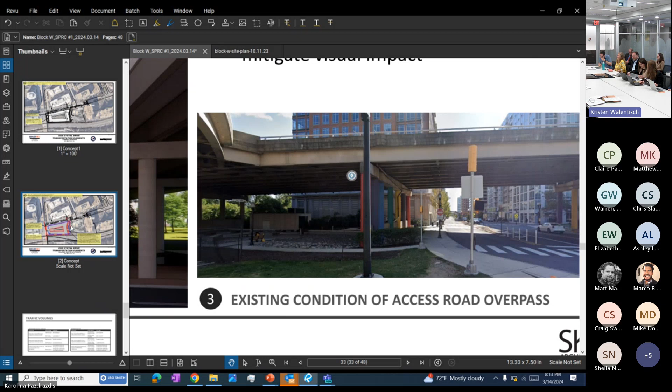But yeah, I think the top's really good too. So thank you, staff, thank you, design team, for going back to fundamentals on this. It's a little bit surprising. Yeah, exactly. Thank you.

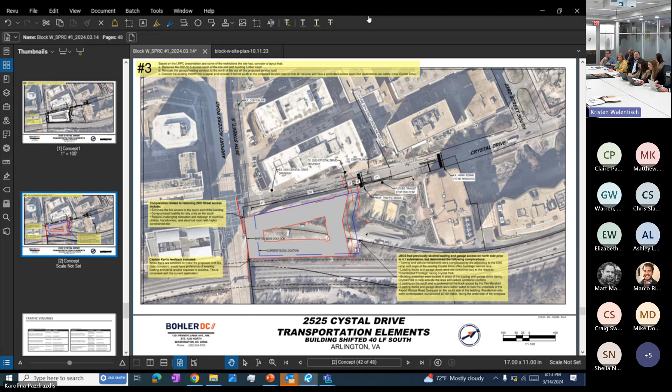Comments, right, two comments. First off, I want to congratulate you on the building. I think I really like a lot of the features of the building. I do like the solid top across. I really do think that's going to define your building in a lot better way, and I really like that. I also really like the corner balconies, making them exciting, and those can be really powerful for you, and really a feature of the building that makes it stand out. So I really like that.

Contrary to my dear friend down there, I like the loading dock by the overpass, because I think the overpass is going to hide it. I personally think it's better there than near the park, where people will actually see it. I think it's going to be kind of hidden back in there, and I actually like it back there. So that's my view, but I'm not an architect.

But again, I would compliment you on lots of the architectural stuff I really like. One thing I haven't seen is what it looks like on the inside, because I know you have a courtyard. I would like to see a little something on the courtyard - just how are you going to design it, what's it going to look like? I know it's maybe not visible from the outside, but it will be visible from higher levels, from other buildings. So if you could give us some idea of what's going to be on the interior courtyard, what's it going to look like? I think that architecturally is important, because you have so many tall buildings, you see down into it.

I think that's certainly something we can do in the second SPRC as part of our landscape. We can incorporate some of the images. I believe there are, in the 4.1 submission, images of the courtyard in there. Yeah, but it wasn't here. And things change.